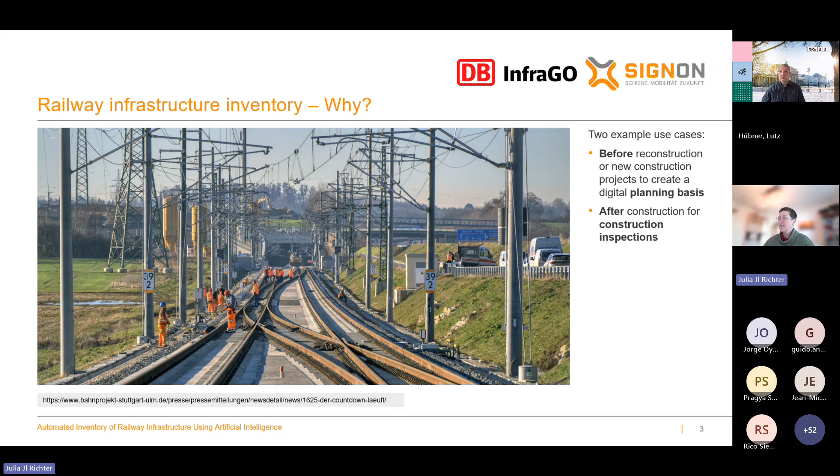And now let's have a look at how infrastructure inventory is performed to date. You very often have on-site route inspections. It's time-consuming, and if it involves track closures, it's also expensive. You have to walk over the track, and it takes very long.

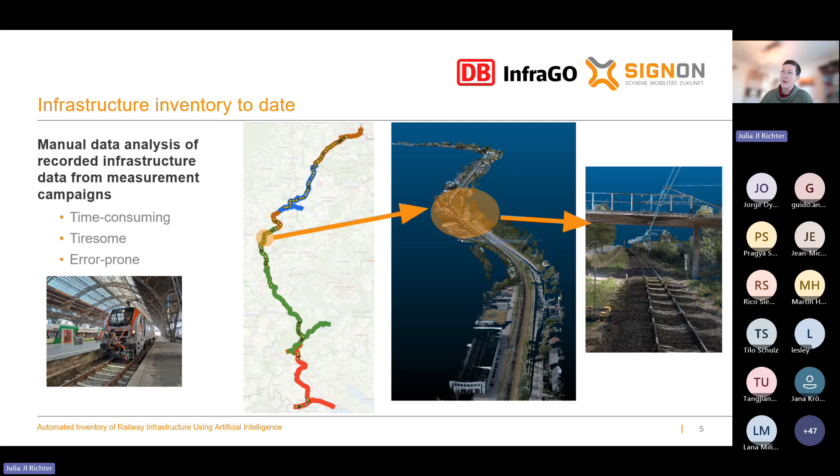Another option you can do is to have measurement campaigns. So you install sensor systems in front of your train, and then you drive along the track and record point clouds. And then step by step, you have to go through the point clouds and check your infrastructure components. This is time consuming and tiresome.

To summarize, all those manual or semi-automated methods are time consuming, expensive, they require expertise, and they are error prone. That's why at SIGNON we propose an AI-based analysis of point clouds, and we call this SIGNON Infra AI Technical Equipment, in short, TECI.

This AI analysis embeds in a tool chain that is composed of measurement campaigns, post-processing, the analysis itself, and comparison and update of databases.

In the measurement campaigns, you register your infrastructure using multi-sensor systems, by installing sensor systems in front of the train and driving along the track you want to record. We have LiDAR sensors for point cloud registration, GNSS for positioning, and cameras mainly for color information. Then this data is post-processed to obtain the sensor system's trajectory, to georeference the data, and also to colorize the point cloud.

This data is an input to our AI analysis. So what we do is a point cloud segmentation. For every point in the point cloud, we assign an object class - for example, does this point belong to a catenary pole? The output of the segmentation are then several points belonging to catenary poles, for example.

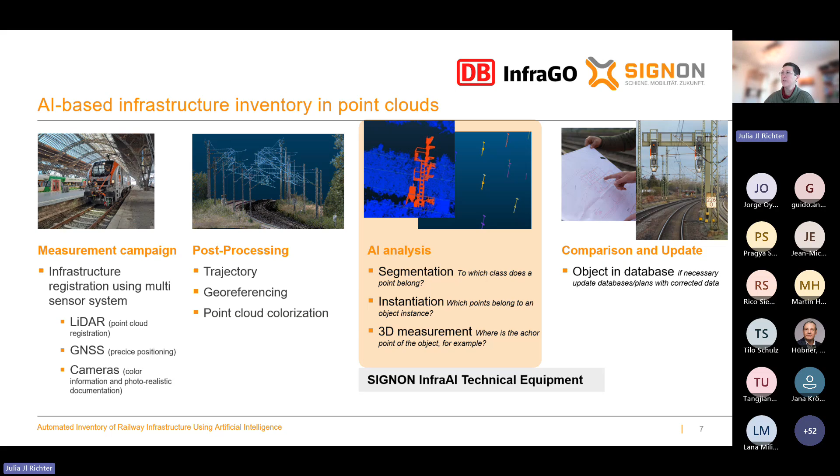What is the advantage of such an AI-based solution? You can see it here on the image. When you have the task to record or make an inventory for all catenary poles or axle counters, you have to go through all the catenary poles, which are very many, in the point cloud. For axle counters, for example, they are very small - you have to find them first. Here, the AI can help you by just highlighting and finding those objects automatically.

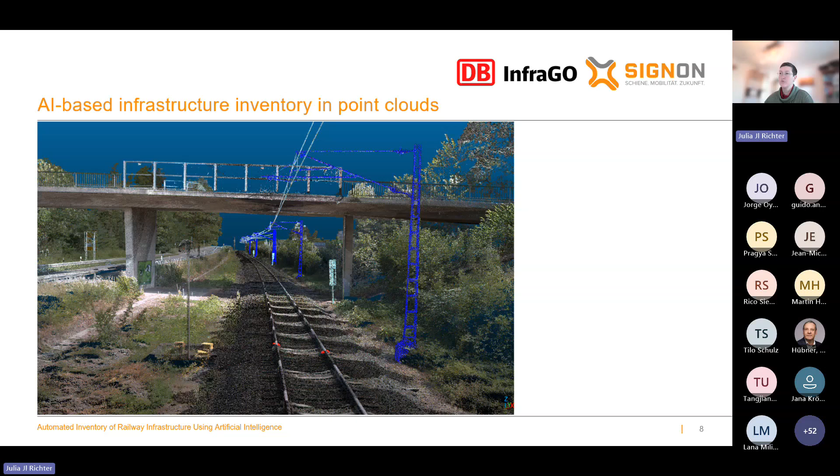So let's have a brief look at the project plan. At the beginning of our project, we analyzed requirements and worked on the concept. Then based on the concept, we developed our prototype - we started labeling data, trained machines, tested and evaluated those machines.

Then we worked on a minimal viable product, an MVP. We added more objects there, worked on performance issues, and created an interface for a downstream tool chain. In our application, it was QGIS, which is an open geo tool.

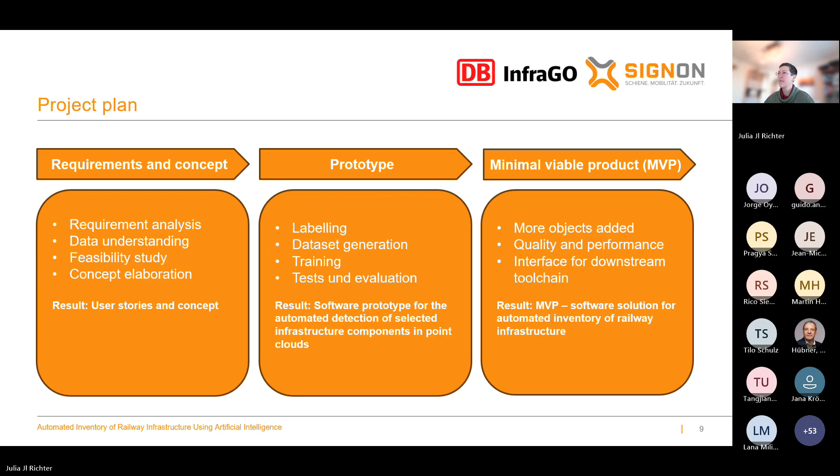For the prototype, we started with 3 different objects. You see here axle counter, pre-signal sign NE3, and catenary pole. We chose axle counters because they are very challenging objects - they are very tiny compared to the surrounding scene, and they don't really stand out in terms of color and geometry, so it's really a challenge here.

For pre-signal signs, we wanted also to know that we can distinguish between the 3, the 2, and the 1 black stripes, and then catenary poles which represent large objects. Then for the MVP, we added more objects, so track magnets, balises, blocking signals, and speed limit signs LF7.

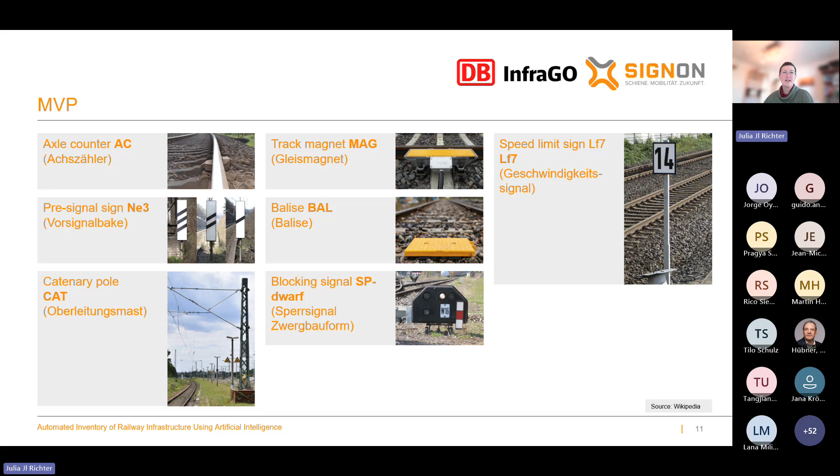And then we did what everyone does when he or she wants to train a machine - we labeled a lot of objects. We annotated those objects, so we cut them out, and this is the basis for our training. So we trained a 3D segmentation net, and the output then is a point cloud with the aim that every object point is classified as an object class.

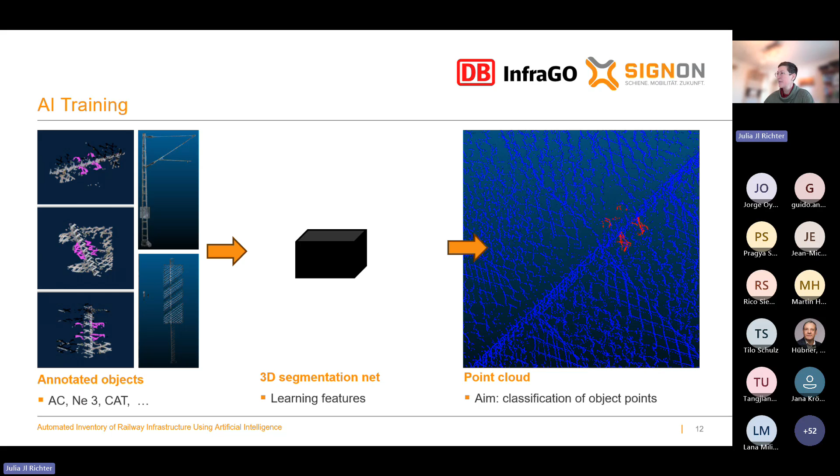We also performed a feasibility study involving 3D network selection. We removed irrelevant regions and split our clouds into smaller tiles to achieve higher resolution and to balance the GPU load, enabling faster training and faster inference.

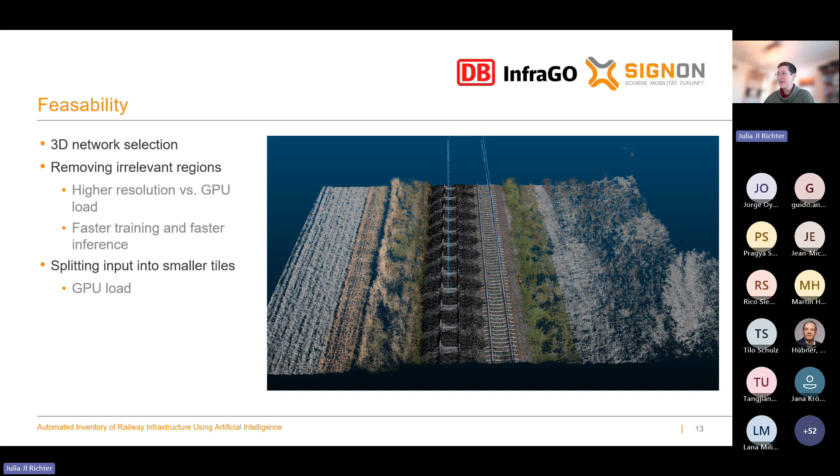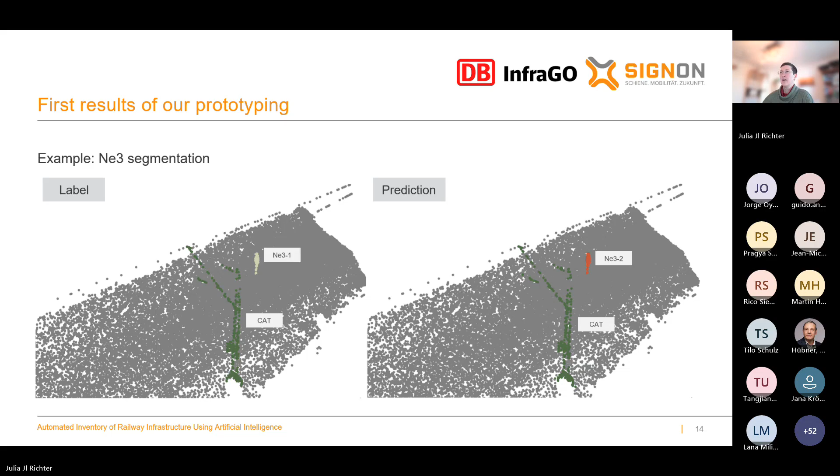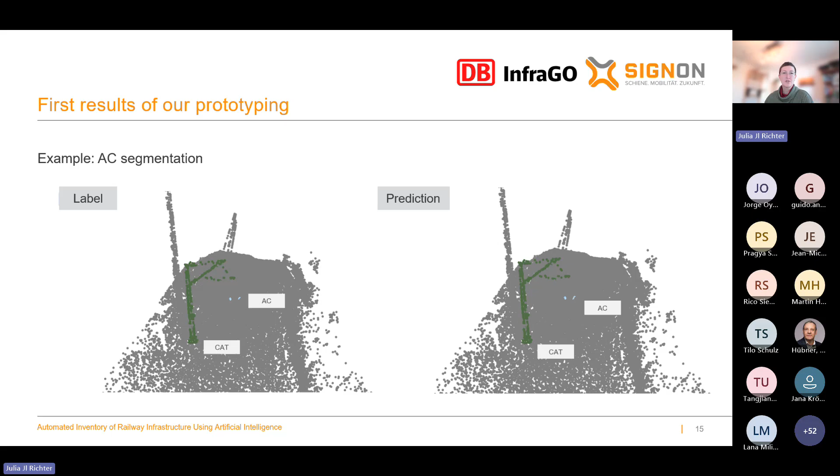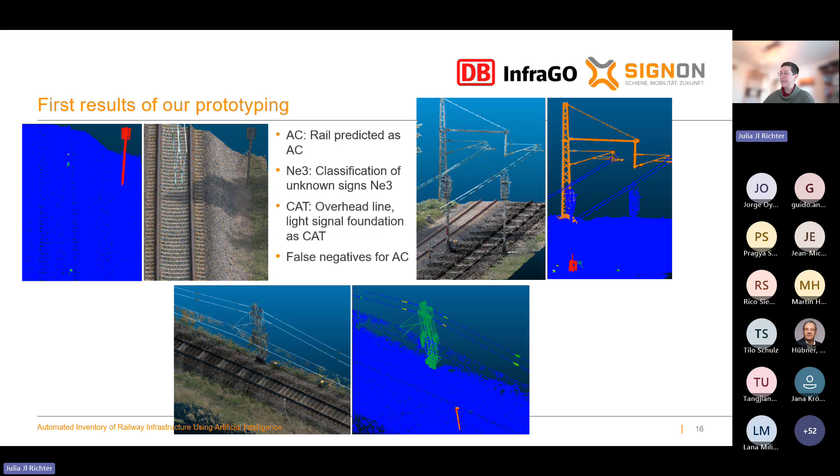Then we had some misclassification in the overhead lines, and also false negatives for axle counters. We worked on that in the MVP phase and improved it, and now here are some example results from the MVP.

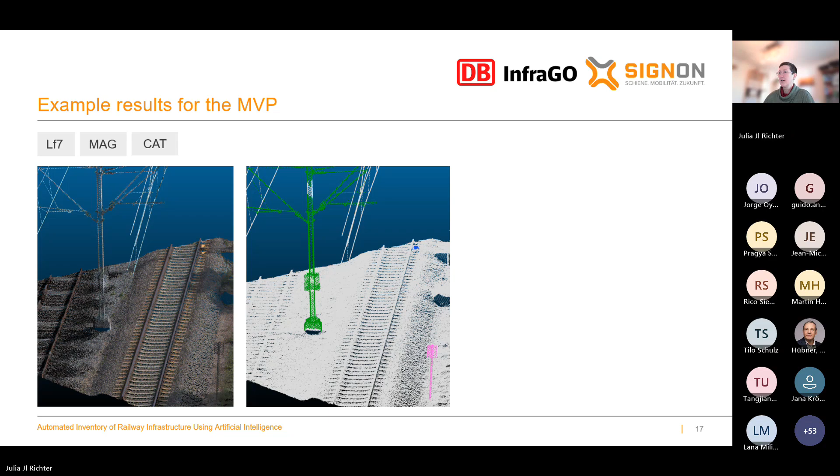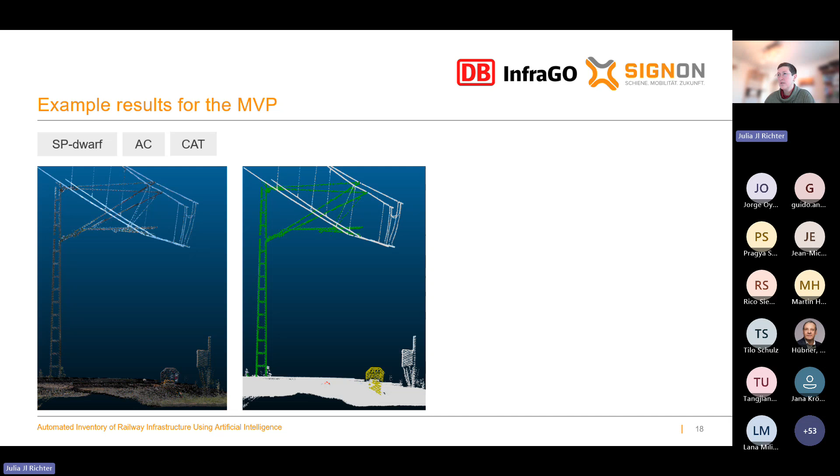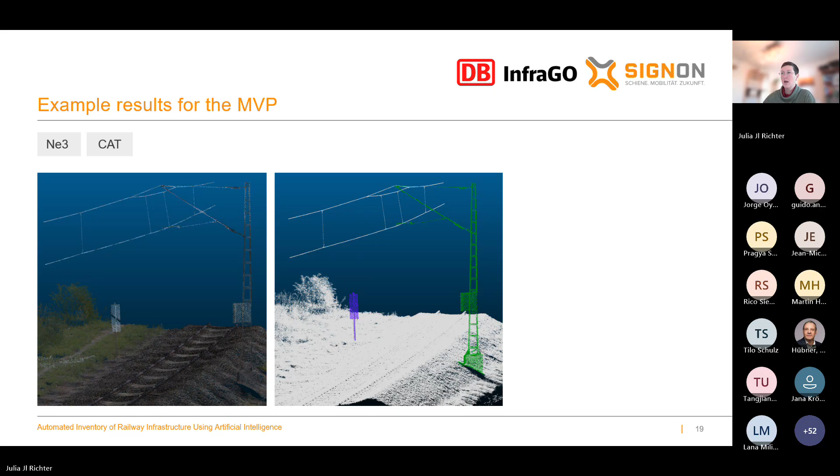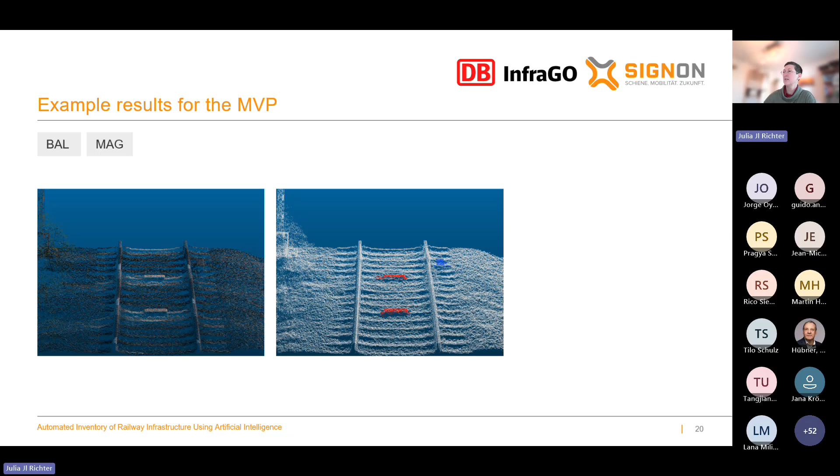Let's also have a look at positioning accuracy results. For correctly detected instances, we calculated the difference between the mean of the labeled object points and the mean of the segmented object points.

With this image, you can see the results when we calculate the mean Euclidean distance, and the results when we use the median Euclidean distance, in centimeters. We are here in a very good range. For catenary poles, we had a few outliers.

This is because in a segmentation like this, the red one was the true positive, and the yellow and green ones were also segmented as catenary pole points, while blue is background - those don't count for the final true positive, they're false positives. But the actual label is the whole catenary pole, so the center point of the label, the white one, is here in the middle, and the center point of the classified true positive is a little bit far away. That's why we have several centimeters difference, leading to this comparably high mean Euclidean distance value. But the majority, you see, is in the range of 2 centimeters or below.

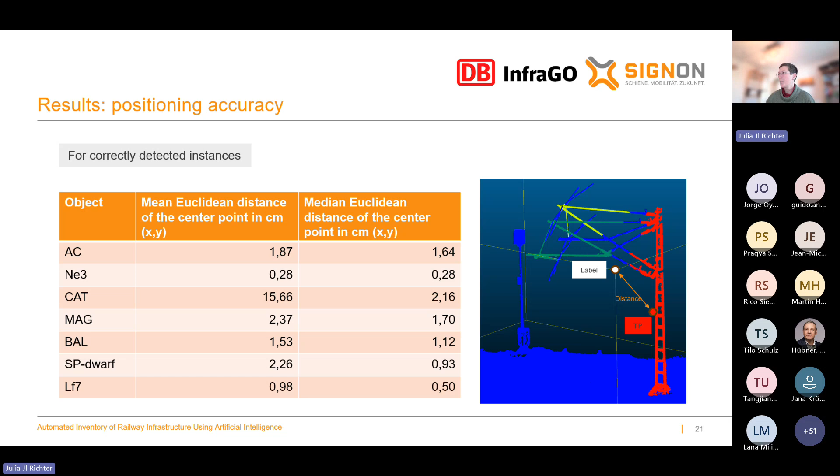Now let's come to the database update. What can we do with all the recorded objects? Well, when you have those dark blue objects here in the database, that one and those two, we can have different cases.

The first case is the green one: you have a recorded object that is also present in the database - it's here in the point cloud, the green one. If this is the case, you can just confirm that we've detected the object which is already in the database. What can also happen is we have newly recorded objects.

Those are the orange ones - they are not in the database, but they are up to date in the actual scene, so you can add them to the database. What can also happen is that the red objects are in the database but not present on site anymore - there's no object at all, so you can delete the object in the database.

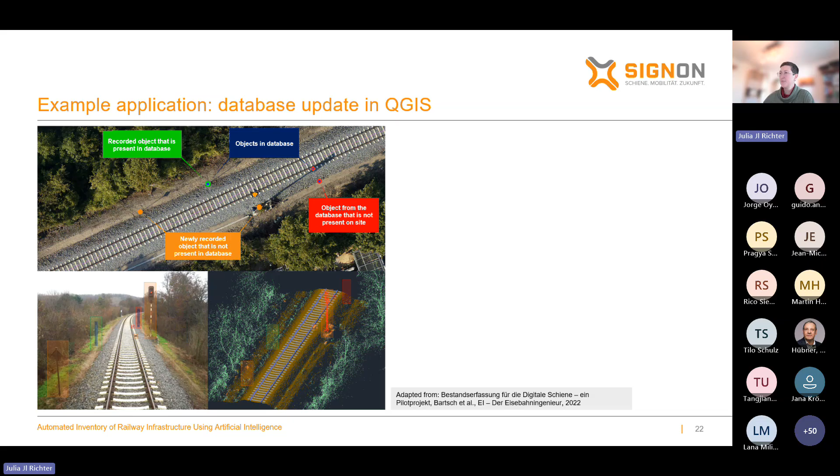Now let's also have a look at how it looks in QGIS when you have imported a point cloud there. The advantage is that you can find objects that are not present in the database very easily, whereas in a manual approach you would not find them - you can't really see the objects here in the point cloud.

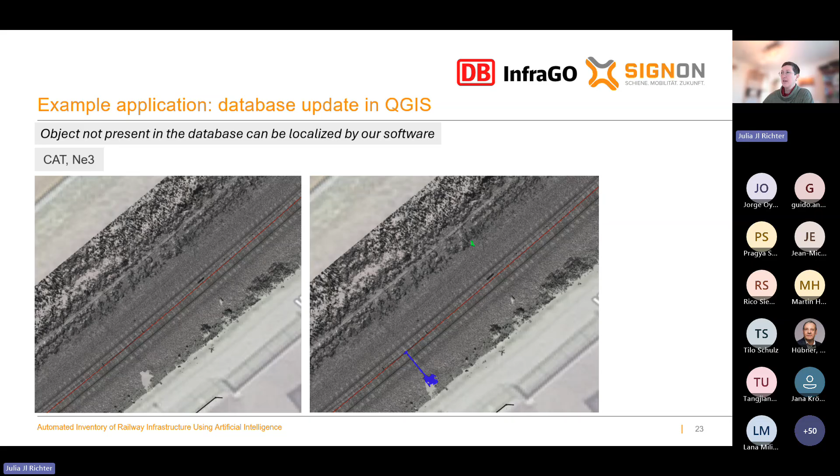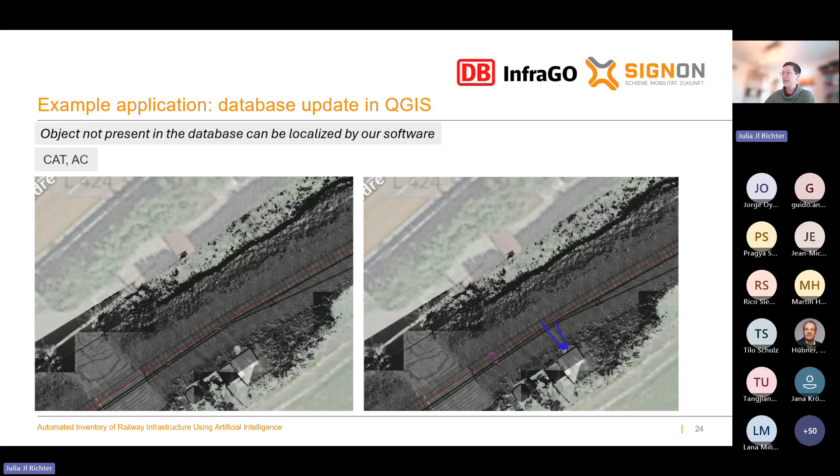The AI enables this and highlights those objects, also outputting the center points. I also have another example here for catenary poles and axle counters. For axle counters it's very difficult to identify them visually, maybe you can guess or see them in the point cloud, maybe not. But the AI highlights them here in magenta and also highlights a catenary pole in blue, so you can easily and automatically find them.

I've also brought you a video using QGIS. Here you see the Ne3. The red point is the imported object point we calculated with our AI solution. When you want to update your database or shift this point to a new measurement position, you can do this manually here in QGIS and then update the data point positions.

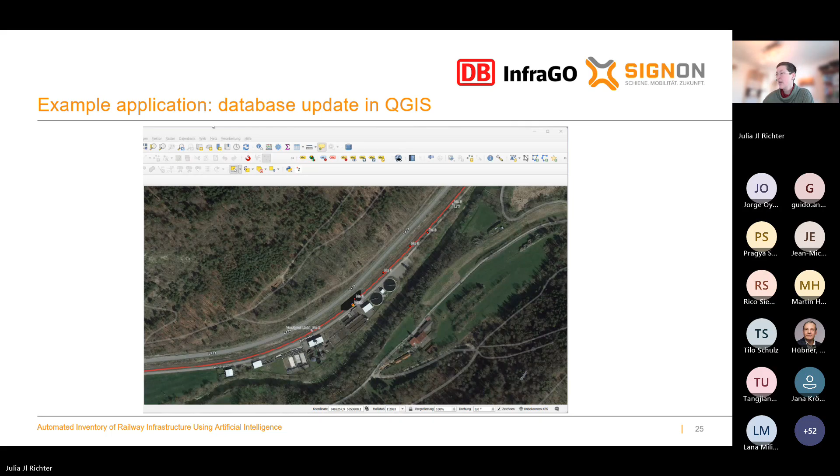So to summarize, our AI is like a second pair of highly precise eyes, only it never gets tired and delivers results in a fraction of the time. Instead of weeks, we only need a few hours or days. We have fewer staff hours, there are no track closures anymore, and the AI closes the gap left by the shortage of specialists. The AI never gets tired, and whether it's 1 kilometer or 10,000, the AI analyzes them all.

So what are our main next steps? We want to work on further pilot projects and are looking for more. We would also like to add more objects depending on the application, such as light signals, for example. It's also sensible and possible to do more fine-granular object segmentation depending on the application.

For example, with overhead catenary systems, maybe you want to know whether you have insulators, where the pole is, what the height of the pole is, which pole types you have. Maybe you want to segment your foundation to measure it or find its center point, and also segment catenary wires, droppers, and contact cables. This is all possible, and we want to work on such projects in the future.

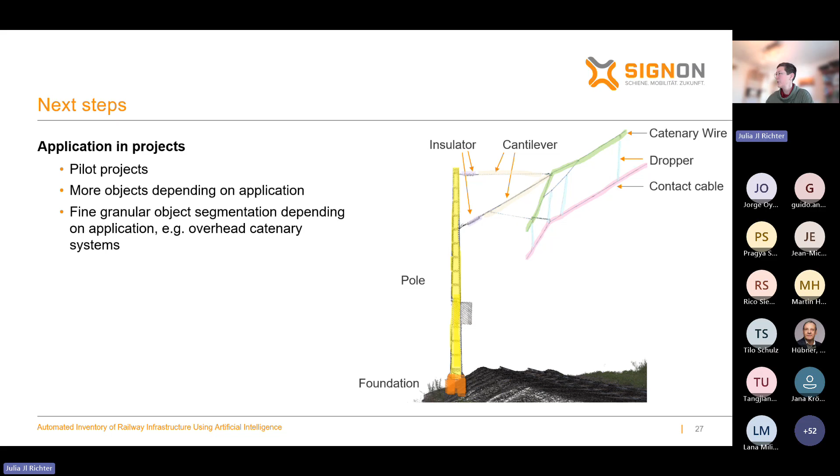Before we come to questions, I would like to briefly show you the results in our point clouds. Also, a hint from my side: we have a publication in the Eisenbahningenieur, so if you're interested, please look at the QR code. Okay, I will end the presentation and switch to another one.

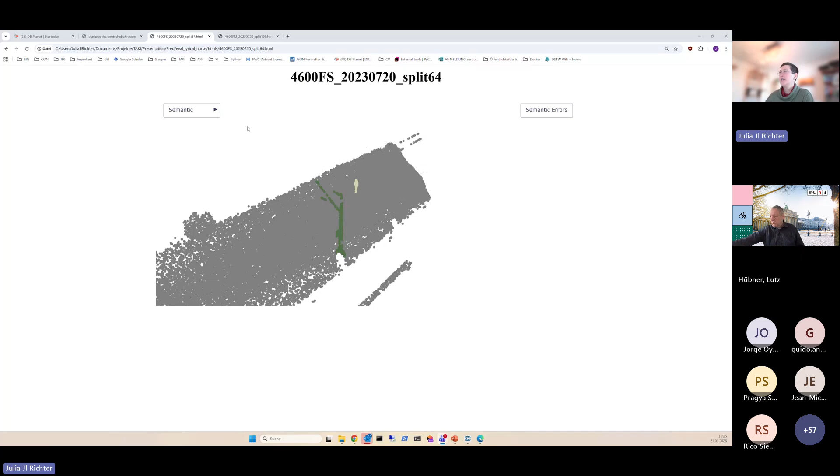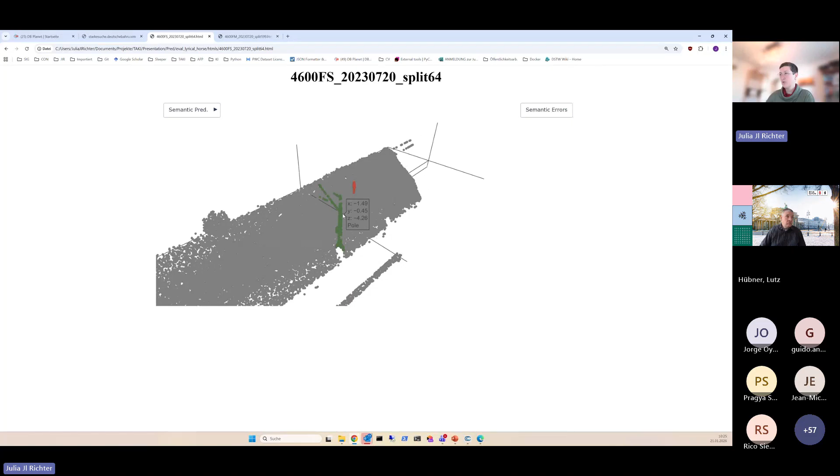You have here the catenary pole. Here you have the NE3 with one stripe; this is a label right now. And here we can switch to the prediction, and then you can see, as you also saw in the presentation, that we detect the catenary pole and the NE3. So it looks like this.

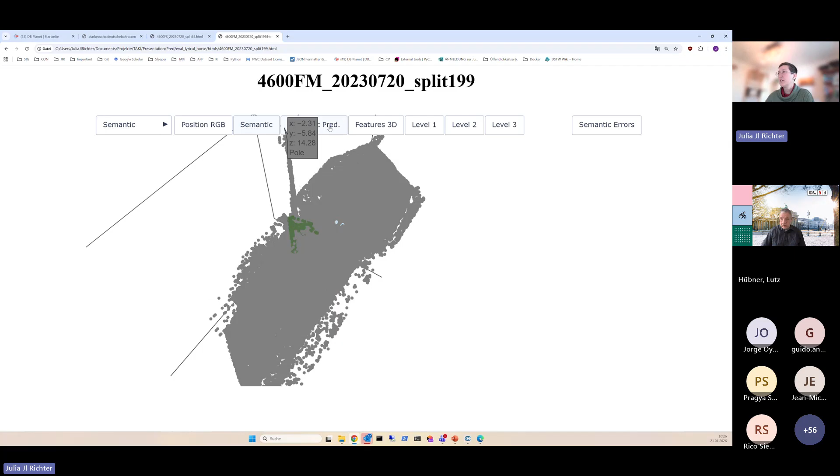And then I have the example with the axle counter. This is also the label; we have labeled the axle counters here. This is the axle counter, this is the catenary pole. And when we now switch to the prediction, you can see that those were detected and segmented in that way.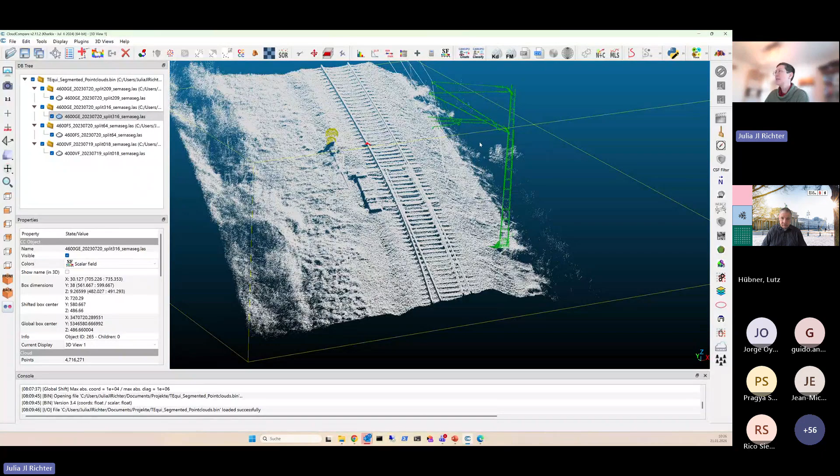I also want to show you some point clouds. This is how it looks in the real point cloud. Everything which is white or light gray is background, and the green one is the catenary pole. When I rotate it, I hope you can see the rotation, and you can also see how the catenary pole is segmented from the cable here.

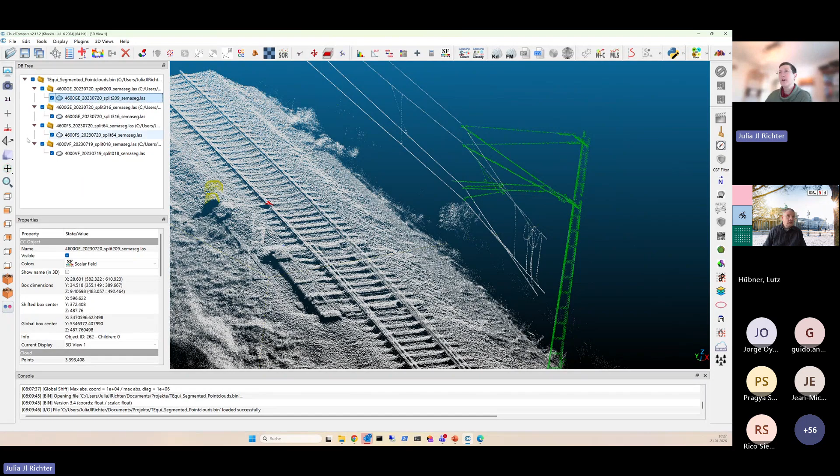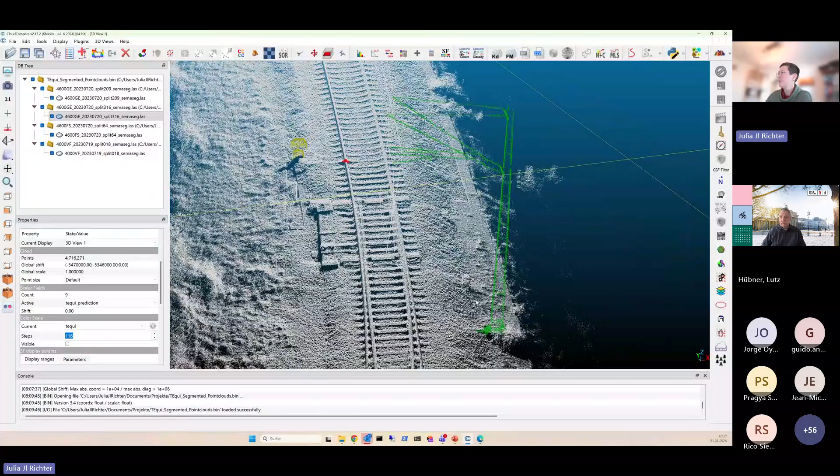Here you also see the axle counter and the SP, the Sperrsignal, the blocking signal. We also have some other segmentations here, but let's go back to this one. This is the prediction, and now when we look at the ground truth, which is what we store in user data, you compare it against the prediction. You see that the prediction, or the segmentation results, are really good.

So now I'm at the end of my presentation. I thank you very much for your attention, and welcome your questions, and hand over back to Rico.

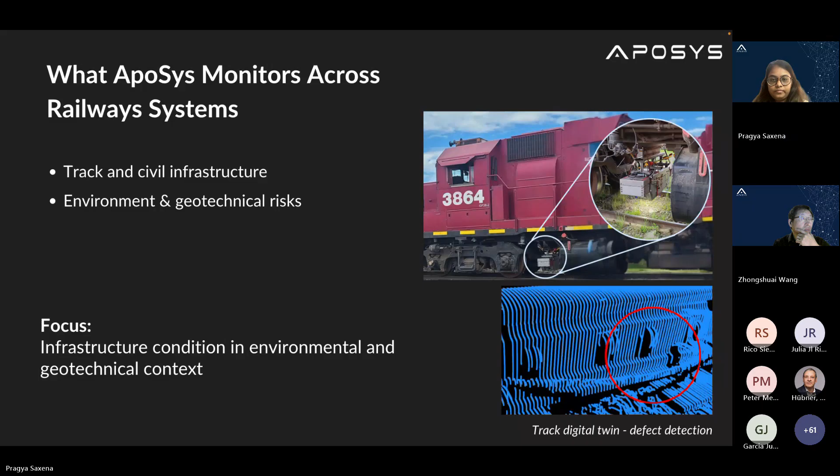As rail networks become more complex and operationally constrained, the way infrastructure is maintained needs to evolve. Aging assets, increasing climate stress, and growing service demands are placing immense pressure on traditional inspection models. Inspections today are still largely manual and periodic, often limited by workforce availability.

Many networks rely on dedicated inspection trains or track recording vehicles, including specialized inspection trains such as Dr. Yellow, which require dedicated track access and operate separately from regular service. This limits operational flexibility and network capacity. As a result, maintenance remains largely reactive, with issues addressed only after defects appear.

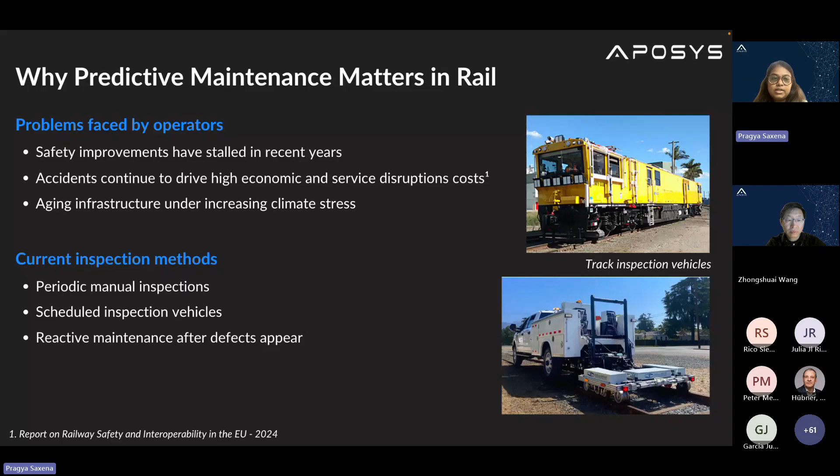Predictive maintenance provides a way to move earlier in the life cycle, reducing disruption while making better use of limited resources. So AI is already being introduced in rail infrastructure monitoring to reduce the reliance on manual inspections that I just talked about.

Today, it's commonly applied to inspection images and videos, as well as track geometry and condition measurements, helping operators detect defects and flag assets that require review. Where AI performs well is in identifying anomalies at the asset level.

However, limitations begin to appear when these models are deployed in isolation. While large volumes of data can now be collected, many systems still struggle to process and integrate this data at scale, especially in near real time.

Most AI models are still trained on siloed datasets and lack integration across inspection, asset, and operational data. As a result, decisions remain driven by static rules rather than evolving conditions. AI outcomes are ultimately constrained by how AI is structured and connected, which is why a holistic approach to how AI is built and what it's built on matters just as much as the models themselves.

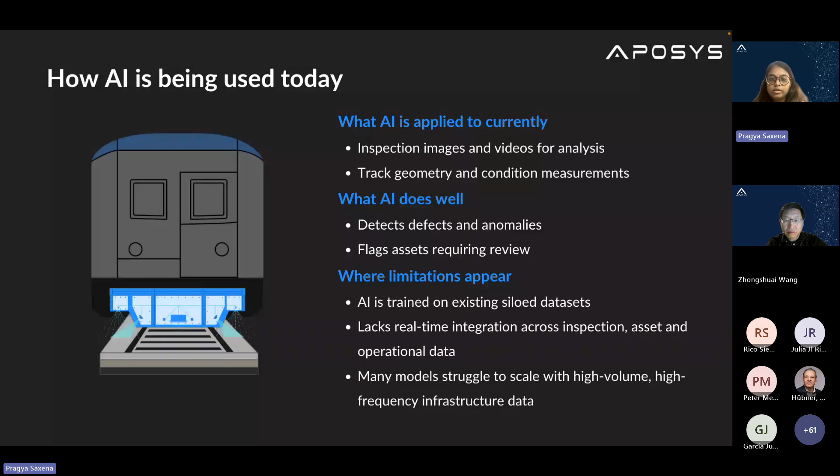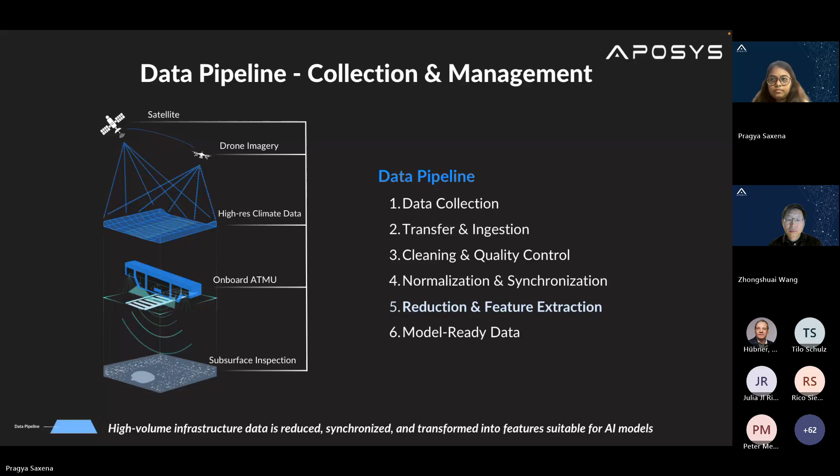This is our onboard ATMU. It is mounted on an in-service rolling stock. Because it operates during live operations, inspections can happen without disrupting train service. The unit captures track geometry and subsurface conditions under real loaded operating conditions, and it performs onboard pre-processing to reduce noise and filter out low-value data before it enters the pipeline. This keeps downstream analysis focused and scalable.

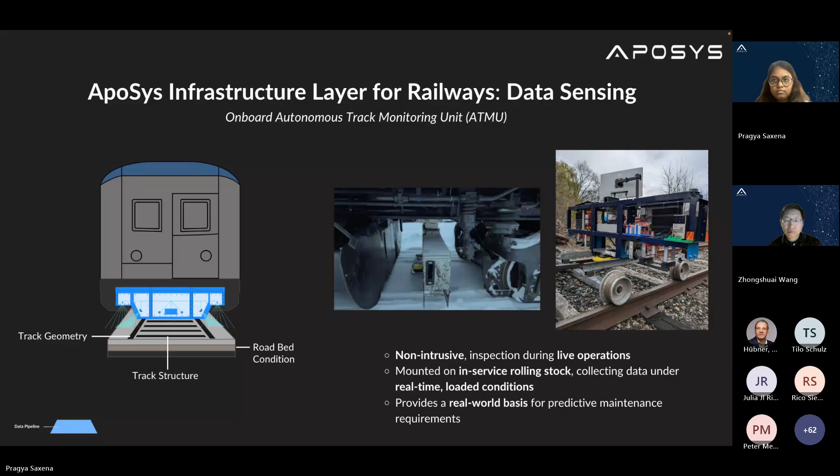One of our key advantages is that our ATMU is an all-in-one sensing unit. We combine geometry, vision, LiDAR, GPS, and ground-penetrating radar on a single platform, and it allows us to capture a consistent synchronized view of infrastructure in one pass. Importantly, the GPR allows us to see below the surface, not just the track condition, but what's happening in the subgrade as well. This is especially critical in regions with permafrost, where freeze-thaw cycles can weaken the ground long before surface defects appear. By understanding both surface and subsurface behavior together, we can move from reactive fixes to earlier, more predictive maintenance decisions.

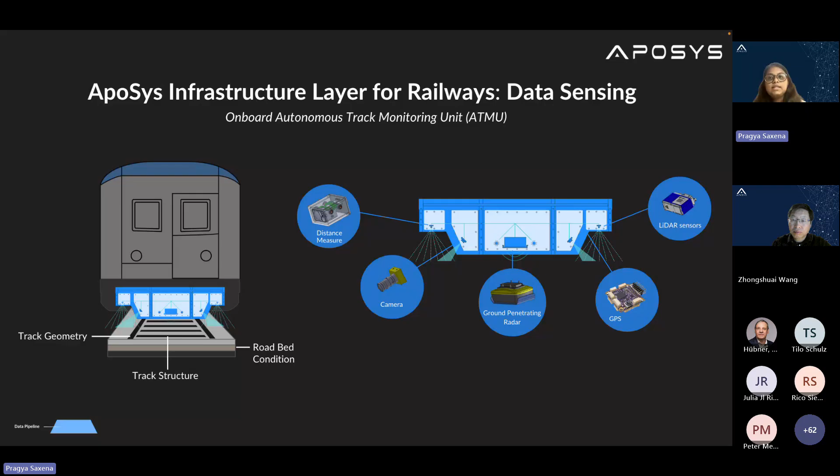So this is an example of an image which is captured by one of the cameras on our ATMU. Our LiDAR sensors can then create a highly accurate digital twin of the infrastructure. The scan captures the track conditions and the surrounding environment, such as vegetation identification and growth.

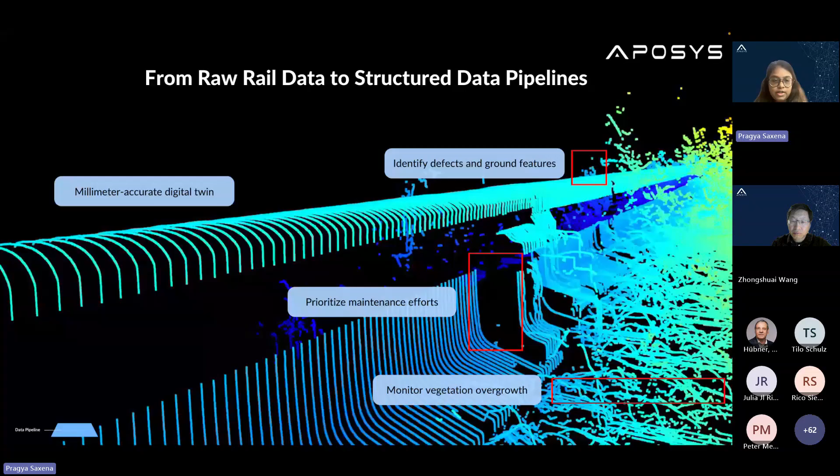Our hardware unit has already been deployed by railway companies such as Hudson Bay Railways in Canada, and the video in the next slide shows one of the earlier field testings with them when we deployed our ATMU unit onto their trains. So the video might be a little bit choppy, but you can see that our unit is installed on an onboard in-service locomotive.

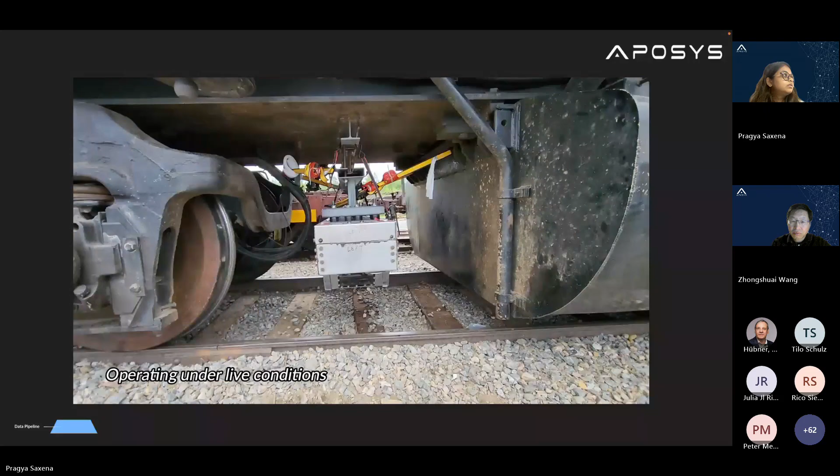And alongside the ATMU, we also integrate satellite-derived analysis to add more broader environmental context. This includes insights such as ground deformation and terrain behavior, and that helps us to understand how surrounding conditions influence the infrastructure performance. We also incorporate environmental and weather data to complete the picture.

Together, these layers allow us to validate and strengthen our interpretations. For example, subsurface changes that are detected by our GPR can be cross-checked against satellite-derived ground deformation trends and local climate conditions, giving us higher confidence in what we're seeing rather than relying on a single signal. This multi-layer context helps us to interpret risks earlier and more accurately. One outcome of this approach is the ability to predict track temperature based on environmental conditions, which is another use case I'll explain shortly.

This slide shows why structured data pipelines matter. By aligning LiDAR, camera, and sensor data into a common synchronized format, we turn raw signals into consistent inputs for our algorithms. This allows us to perform track geometry and condition analysis alongside defect detection, using the same underlying data foundation. Only with structured data pipelines can models be trained reliably across modalities, improving both predictive performance and confidence in the results.

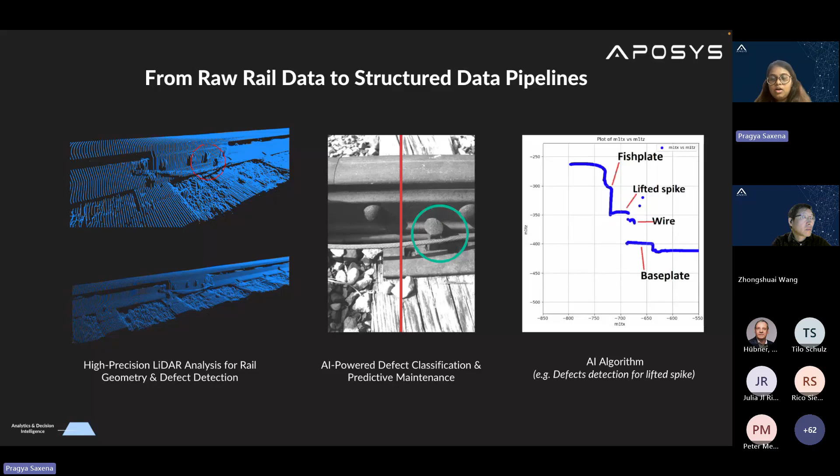Once the data is structured, we move into analytics through machine vision models. These models operate both at the image and pixel level, allowing us to detect and classify defects with higher precision rather than relying on simple thresholds. Importantly, we explicitly manage uncertainty, distinguishing true defects from false positives. This helps to ensure that whatever gets flagged for review is meaningful and actionable and not just visually different.

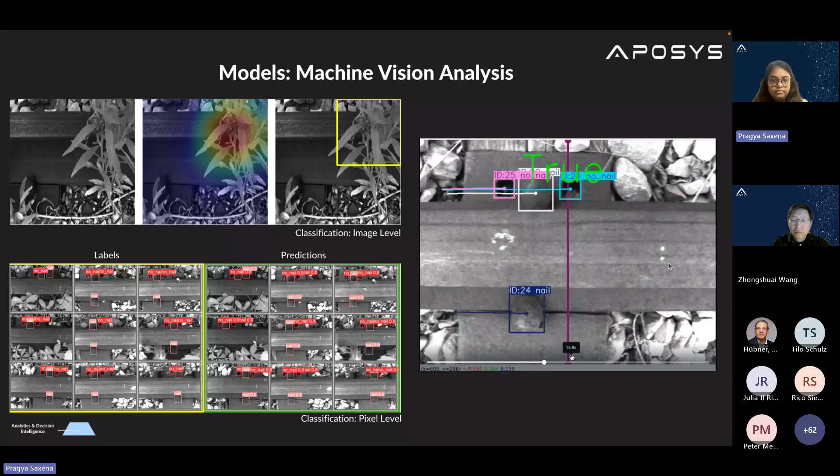Our models are designed to be rail-aware and work seamlessly across our sensors. The same defect can be identified in camera imagery and confirmed through LiDAR geometry, improving confidence in the result. By fusing multiple sensing modalities within a common framework, we move beyond single sensor detection towards a more reliable inference. This forms the basis for decision intelligence, where outputs support prioritization and planning, not just detection.

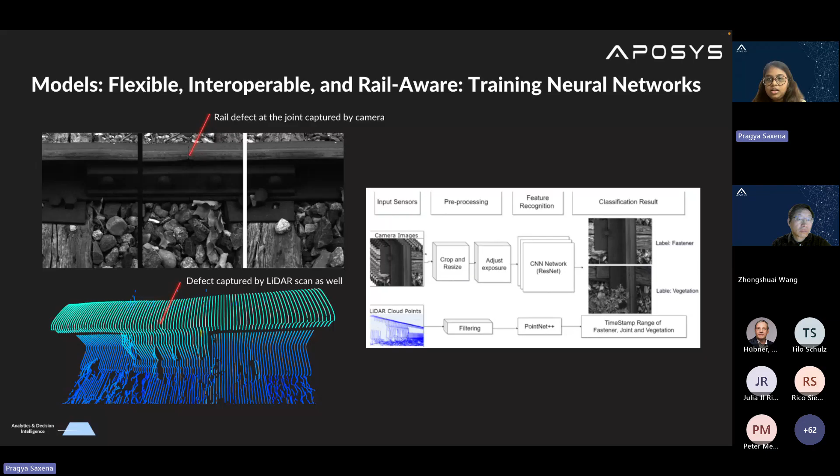All of the insights generated across sensing, data pipelines, and analytics come together in our Apollo dashboard, which serves as the primary interface for our customers. We've intentionally designed the interface to feel familiar to rail operators with a QGIS-style experience. This makes it easier to navigate, interpret, and act on insights without changing existing workflows. The same dashboard supports multiple users and multiple applications, from defect analysis to maintenance planning, all in one place.

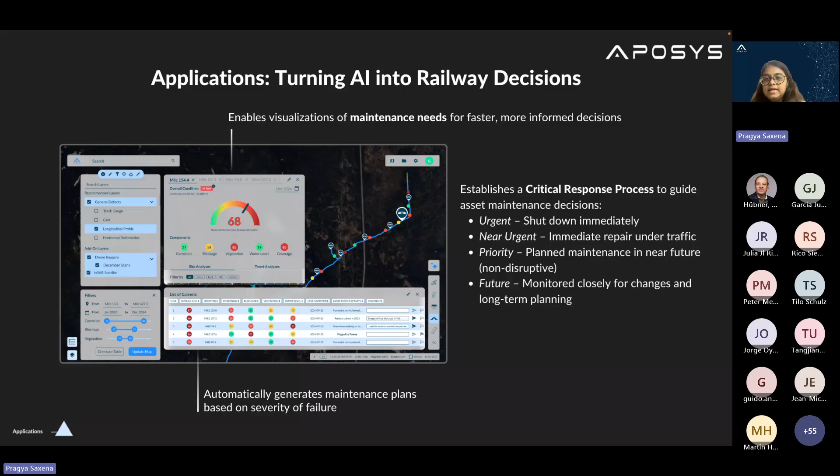By translating model outputs into clear visualizations and prioritized actions, we make decision-making faster, more consistent, and easier to scale across the network. This brings everything together into our end-to-end Aposys solution, from data collection to data management and processing, and lastly, reporting and visualization in a single integrated framework.

This framework forms the foundation of our platform, and we adapt the same underlying technology across different railway and infrastructure use cases, depending on the operational needs of our customers.

For example, for our railway operators, one application of this framework is culvert monitoring. Manual culvert inspections are slow, inconsistent, and often infrequent. We use teleoperated drone-based inspections with real-time data upload and analysis, making inspections highly effective even in remote regions, while AI detects issues like blockage, corrosion, or erosion, and surface risk directly in a centralized dashboard for proactive maintenance. And the dashboard you see here is the same dashboard I showed earlier.

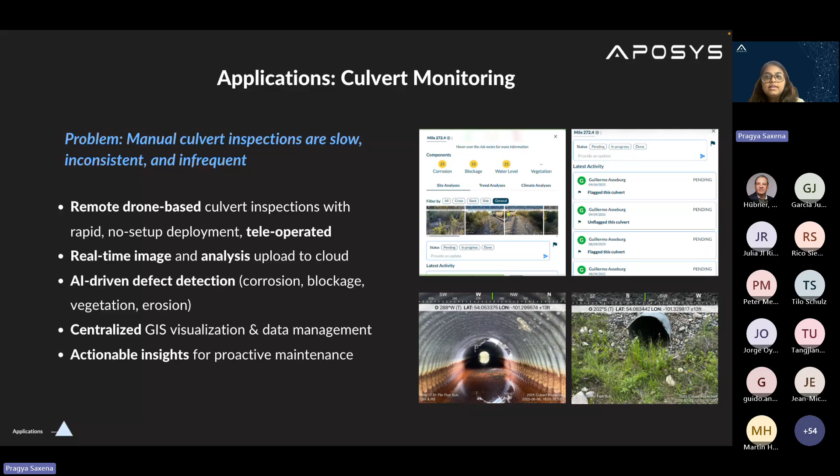Another example would be predicting track temperature. Today, train speeds are often set reactively based on current conditions. Here, the black line shows the actual track temperature, while the red line shows our prediction, allowing operators to anticipate heat-related risks earlier and manage speeds more efficiently across the day.

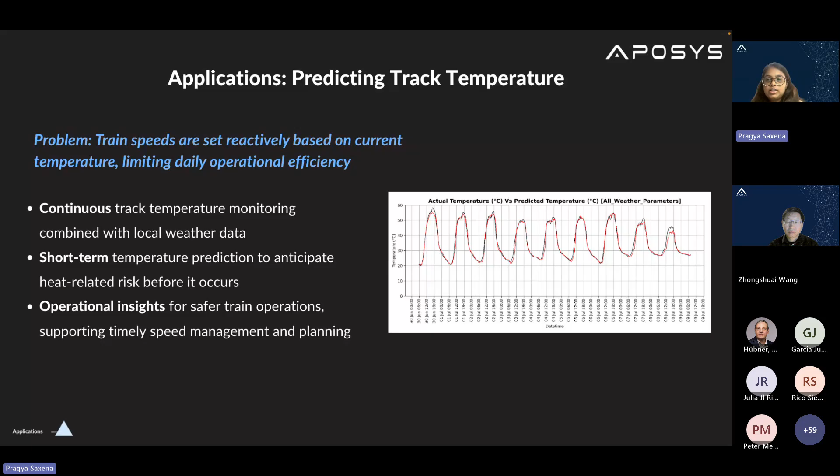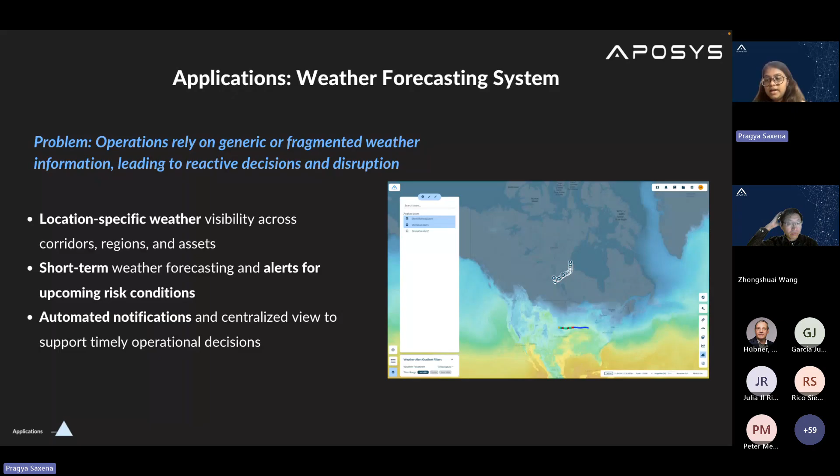We also provide a rail-specific weather forecasting system. Instead of relying on generic weather reports, operators get location-specific visibility along rail corridors with short-term forecasts and alerts for upcoming risk conditions, supporting faster and more informed operational decisions. So as you could see, the culvert monitoring, weather forecasting, and predicting track temperature can all be seen on the same dashboard, and we customize all these solutions for our railway customers.

Another application apart from railway monitoring would be applying this same sensing and AI framework to road monitoring. We've already retrofitted similar sensor suites onto service vehicles, and we've been able to detect and monitor road conditions, detect vegetation obstructing signages, and identify both surface and subsurface risks, all using the same data pipeline and analytics stack.

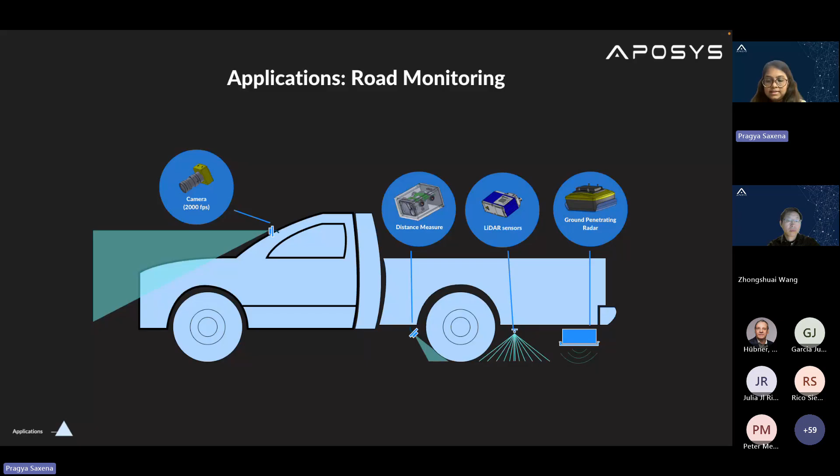A further extension of road monitoring would be winter and ice road monitoring, which is very relevant in Canada. For winter and ice roads, especially in the Arctic and northern communities, safety and accessibility depends on constantly changing ice and ground conditions. We combine field sensors with satellite and environmental data to assess ice thickness, monitor freeze-thaw behavior, and identify emerging risk zones in near real time. These insights allow operators to make safer routing and access decisions earlier with far less reliance on manual checks, helping to keep the critical supply routes open while reducing the risk at the same time.

Again, the same framework also extends to other critical infrastructure. For example, our technology can be integrated onto existing inspection platforms such as PIGs, pipeline inspection gauges, to support positioning, signal communication, and defect analysis in pipelines. The key point here is that whether it's rail, roads, pipelines, or tunnels, the underlying framework remains the same, only the sensors and the context change.

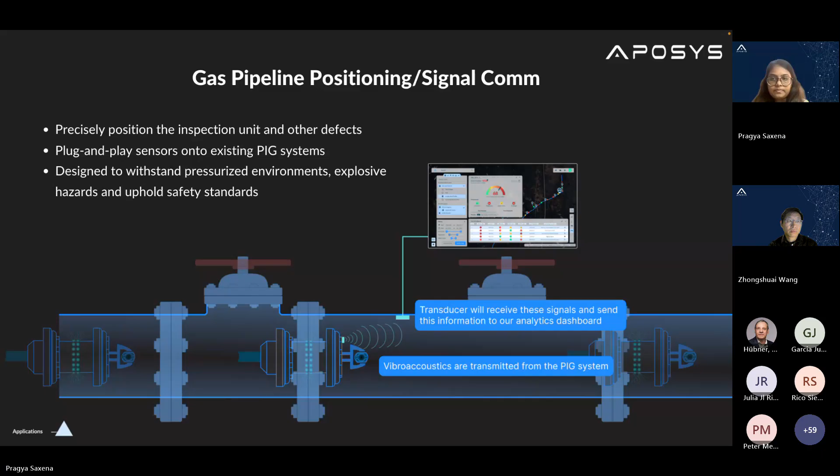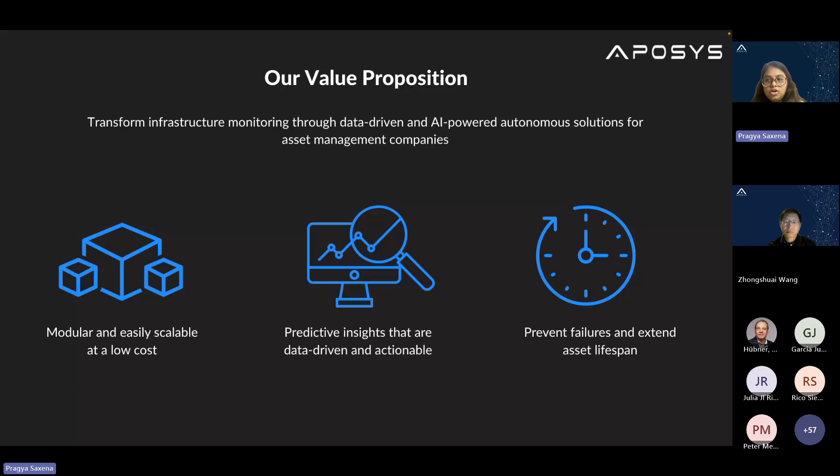At a high level, our value proposition is about making infrastructure monitoring more scalable, more predictive, and more actionable. Our solutions are modular and cost-effective, so they can be deployed incrementally. By combining sensing, data pipelines, and AI, we turn raw data into predictive insights that operators can actually act on, helping to prevent failures and extend asset lifespan rather than reacting after the issues occur.

We work closely with rail operators, infrastructure owners, and industrial partners to validate and deploy these solutions in real operating environments. This includes active collaborations across railways, infrastructure monitoring, and energy systems, as well as ongoing discussions internationally. These partnerships will ensure our technology is grounded in real operational needs and continues to scale across different geographies and asset types.